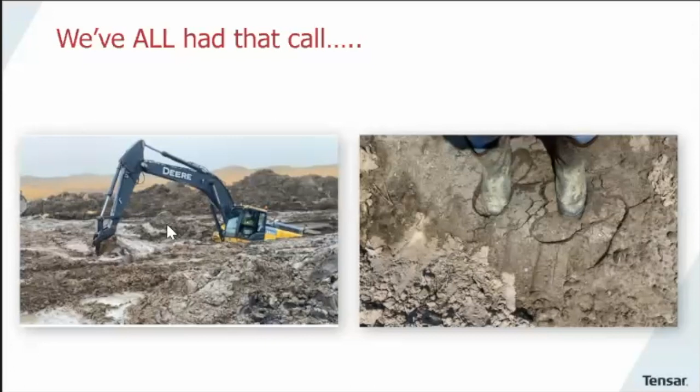What I'm here today to say is, I don't have a golden ticket, a magic wand, or pixie dust. I don't want the takeaway to be that Tensar is the one-size-fits-all solution for every problem you may have. We're another tool for your tool bag. If you get this call, you've all got your own bag of tricks—we can over-excavate and replace, we can do this, we can do that. I just want Tensar or geogrid to be another option, another tool that may help us out of this. So that's the main takeaway: Tensar can be there to help offer a solution when we run into issues like this.

There's a quick agenda, but you'll see that as we go along.

So who is Tensar? As of last year, we are now considered a division of CMC. Has anybody heard of CMC? I'm always curious to see. CMC is a Fortune 500 company—they own the market share for rebar. So chances are, if you've worked on a project and seen a piece of rebar, it came from one of CMC's plants. So we're now a steel company, a plastics company owned by a steel company. And if you've ever driven down farmland and seen a green T-post with a white top, that came out of a CMC plant. That's their trademark, the green T-post with a white top.

So what does that mean to us? It means we now have a large company that's no longer just a capital investment firm, but an actual manufacturer that shares their expertise and resources with us. So far, knock on wood, it's been a good marriage. We've taken a lot of benefits out of it, and I'm anxious to see what happens in the future. Tensar is a very innovative company.

We invented geogrid back in the 1980s, and we've invented every notable improvement on geogrid since then—different sizes, shapes. We're constantly doing research, and we'll talk more about that in the presentation. We've produced almost 1.2 billion square yards of material so far. We own 2 plants in the US and 3 others worldwide, although one of them's in Russia, so I'm not really sure how that all plays out. But anyway, we're a worldwide manufacturer with a large presence in Europe, Africa, and Asia.

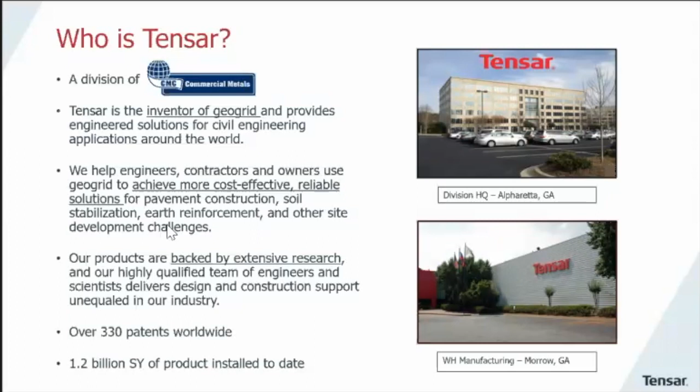Not only do we have people in the field working on a geographic basis, we also have people working on a market-specific basis. So while you're in North Carolina, you might make me your first contact, but if you're working on a petrochem project, we have guys that specifically work in the petrochem marketplace. We have market managers that work in the rail marketplace—if there's large rail projects, we have people in the rail industry that work specifically with that industry. Pavement maintenance, interlayers, public roads—we have a lot of different markets that we focus on internally within Tensar. So I have those resources available: if you're running across a rail project and I don't have a lot of experience, I can leverage one of those guys within our office.

Not only that, we have key account representatives that work with key accounts like Kiewit and Ames, the large contractors of the world—guys that specifically deal with them. If you've ever dealt with Kiewit on a project, you know they're an extremely large company, but extremely fractured. The left hand has no idea what the right hand is doing.

And somehow we've managed to, over the years, break through that and have learned to develop a really good working relationship with Kiewit, along with a lot of other large national contractors as well. So that's Tensar in a nutshell.

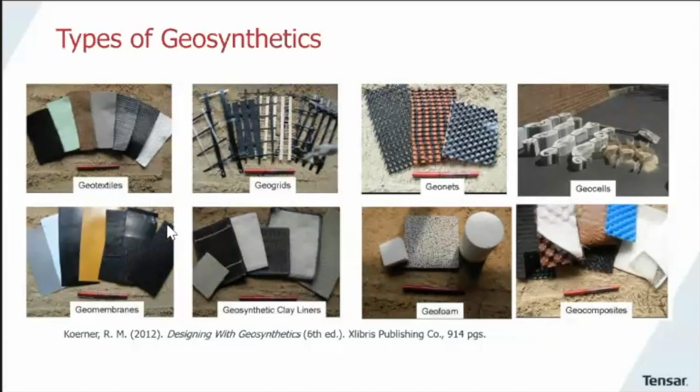All right, let's dive into it. Types of geosynthetics. I don't have a magic wand that gives you a one-size-fits-all solution. There are a ton of different geosynthetics manufactured for the construction marketplace, and all of them have a niche where they work really well, and other applications where they work kind of well. So there's not a one-size-fits-all. Geotextiles work really well in certain applications, geogrids work really well, geonets on down the list. They all have their sweet spot.

These are the main geosynthetic functions you'll see: stabilization, which is dealing with soft soils or soft subgrades; reinforcement, which is basically walls and slopes or grade separation; separation and filtration, which to me are very much the same thing; drainage layers, so geosynthetic drainage layers take the place of like 57 stone or clean graded aggregates, performing the function of getting subgrade water out of your design area; and then containment, like geosynthetic liners.

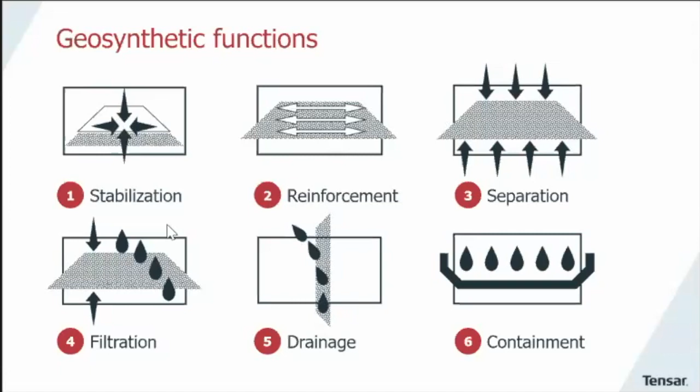Where Tensar really plays with geogrid is in the stabilization and reinforcement market. Now we do have fits in the separation and filtration area, but I wouldn't say you come running to Tensar like, hey, I need to separate these two layers of soils. Yeah, maybe we can, but we're probably not the best fit there. Where we really focus our time is stabilization and reinforcement.

So stabilization, once again, dealing with soft soils, construction platforms, foundations, things of that nature. And reinforcement would be walls and slopes - reinforced walls, reinforced slopes.

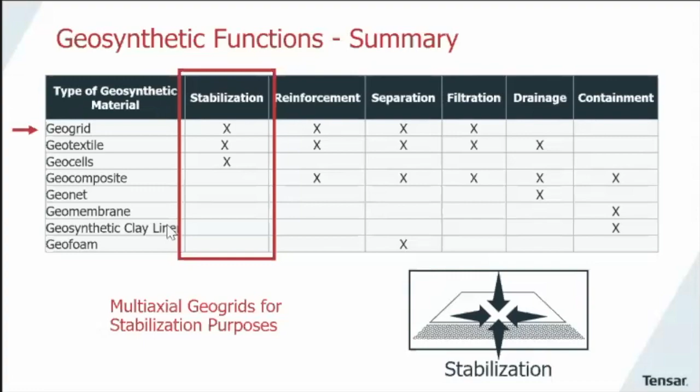So what are geogrids? Geogrids provide these different functions. The main one I'm going to talk about today is stabilization. I brought in samples of different types of geogrids. Tensar invented geogrids back in the 1980s, and this was the invention, the biaxial geogrid.

We still sell a ton of this material. It is not our best seller, but it is up there. We still sell this every day. Contractors use it every day. It still works well. Back in the late 90s, early 2000s, this was the next iteration.

I told you, Tensar loves to research, we love to innovate. So this was the first big innovation that came out of Tensar: the triaxial geogrid. So we have good, we have better, and we'll talk about that in the presentation. Then a couple of years ago, we came out with what right now for the marketplace is the best: this is InterAx geogrid.

I'll pass these around in just a few minutes so you'll be able to see it. That's what an innovative company does - hey, we take a good idea and we keep iterating and improving on it to make the product better, more financially feasible for the marketplace. And all of these geogrids here are used in that stabilization application.

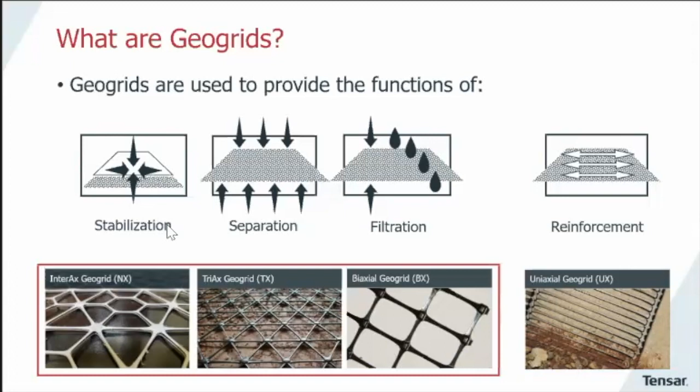And then for reinforcement, we have the uniaxial geogrid. It's a really high tensile strength geogrid that's used to stabilize slopes. As you might imagine, you do need that tensile strength in an MSE structure to stabilize and reinforce it, and that's where uniaxial geogrids come into play.

So here's a picture - we have a stabilized slope, and here we have a wall system. Maybe the geotechs can answer this one if they know, but there's a certain difference where a slope becomes a wall and where a wall becomes a slope. I think it's something like 70 degrees. Seems like splitting hairs to me. All of that is reinforced earth, that's all I know.

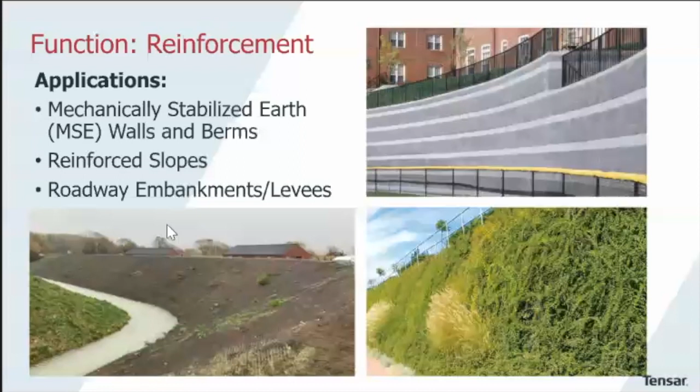I know just enough about walls to be dangerous, but if you do have a wall question, you can come see me after. I'll be happy to address it or get you in touch with David Fuquay, who's our area engineer that can answer that as well.

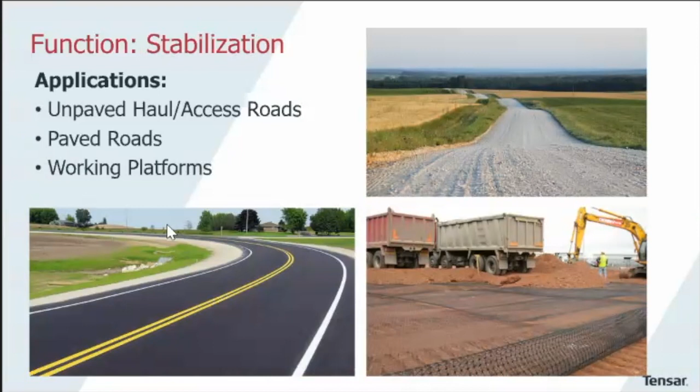However, stabilization - this is our bread and butter. This is what we spend our day in, day out working on: stabilization projects, paved roads, unpaved roads, construction platforms, lay down yards, lots and lots of haul roads. You name it - the softer the soil, the better the fit, the more phone calls we get. So how do geogrids actually work?

We know that geogrids work. Most of you have probably seen them on a job site. Contractor will lay it out, dump some aggregate on top of it, and all of a sudden a soil that was moving and rutting becomes very stable. All right, that's pretty straightforward. But what are the actual mechanisms?

As engineers, we want to dig a little deeper and understand how it actually works. Some really smart guys at the Army Corps of Engineers in Vicksburg, Mississippi, that run their soils lab there, commissioned a report to understand how geogrids work. Mr. Jeb Tingle attended Mississippi State University with me at the same time, and I think he now has his PhD. He's far outshined me in his career. They published this report back in 2003, and they said there are three main mechanisms whereby geogrid performs.

The first is the tension membrane effect. I have it labeled number three, but we'll talk about it first. Tension membrane is simply like a trampoline. You step onto a trampoline, the trampoline has to go into tension to support you. That's how a geotextile typically would perform: you roll a geotextile out over a soft soil, you step on it, or you roll aggregate out onto it, and then you have to rut it in. So that geotextile has to go into tension before it provides the support you're looking for.

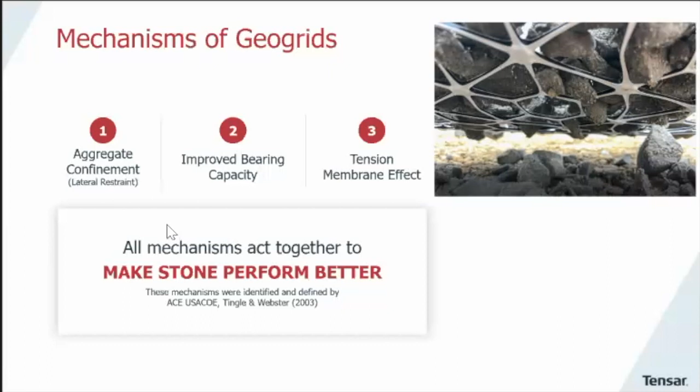Aggregate striking through the geogrid, interlocking, mechanically interlocking with the geogrid and preventing that rutting mechanism. And maybe we can see a better picture of that here. So the best way for me to envision that interlock, that mechanical interlock, is a rack with billiard balls.

So if I lifted that rack up, those billiard balls would scatter all over the table. But because I have that rack there holding it in place, I can come and put a surcharge pressure on top of that billiard ball. And 200, 500 pounds, I don't know how much it holds, but those billiard balls would remain stable because they're being laterally confined, laterally restrained. Same exact way geogrid works.

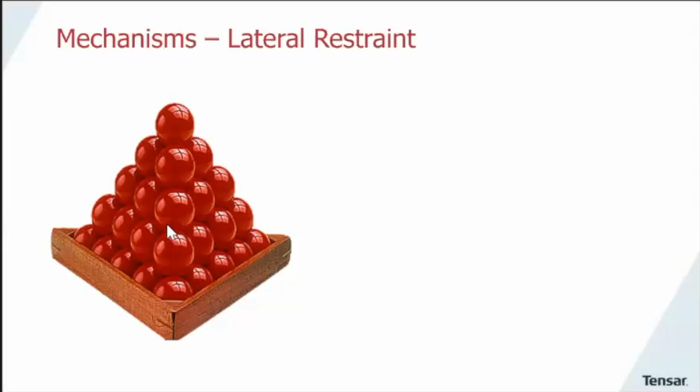So you'll notice there is a vertical component to that, where it's not just one layer of billiard balls thick, it's multiple layers. That's the way it works with aggregate. We're laterally confining aggregate at the bottom layer, and that influence goes all the way up into the section. We've measured that up to about 16 to 17 inches into the section. Is it the same as it is down low? No, but there is still an influence up there.

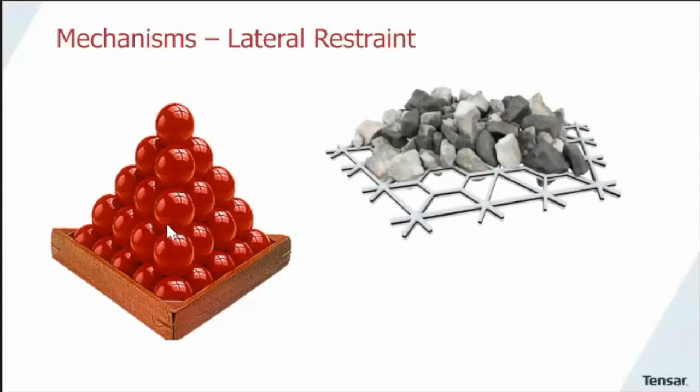So what we're trying to prevent, at the end of the day, our enemy is rutting. Whether that's on a construction platform or a paved road, we're trying to reduce rutting. Rutting is like a lateral mechanism. So what happens: you get the load from those wheels, the aggregate wants to rotate, and it wants to rotate out. What the geogrid does is restrain that aggregate, prevent that rotational motion, and reduce the rutting long term. So it's that simple.

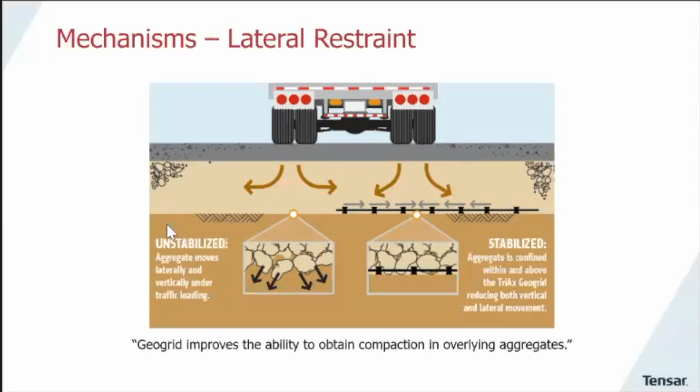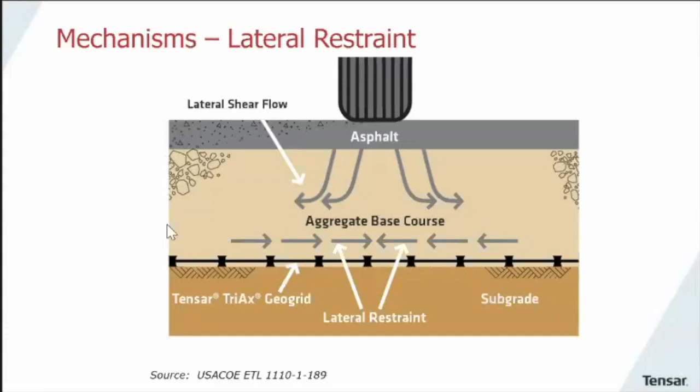And it works. So here's a better picture of it. You've got the asphalt layer, we have that lateral shear flow, and then we have the aggregate base course that's being held in place because the geogrid is there holding it in place.

This is another way to envision it, a little dog and pony show. We call it the magic box of rocks. We build a box, fill it with GAB material, graded aggregate base, and pull the sides off. The whole thing slumps down. If you build that same box with the same aggregate, but add 2 or 3 pieces of geogrid, and pull the sides off, it stays stable because of that lateral restraint mechanism. That's what this does a good job of envisioning.

Now, we can't really design with this. This is just a trick that helps you visualize how it's working, but it doesn't really help you as an engineer in your day-to-day designs.

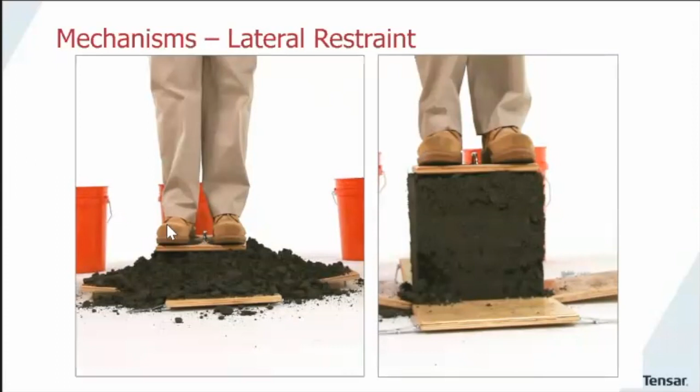So I mentioned good, better, best, and I'll pass these around now. How do we know that, and how does that come back to the lateral restraint mechanism?

Here you see the biaxial geogrid. This is the highest tensile strength geogrid, short of a uniaxial geogrid. Of the 3 geogrids I have up here, this is the highest tensile strength. So if a contractor comes to you and says, this is the strongest geogrid I can get at my local supply house, that sounds great, let's use it. However, as you see here, it's probably the least effective, and it's all due to the height of the ribs.

This is good, we sell a lot of this, it works. This one happens to work better, and this happens to work best. I'll pass these around so you can compare the rib heights on those mechanisms. Geometry plays into that, and a few other things play into it with the chemical composition we use, but by and large, the biggest benefit you get is from that rib height, that rib profile.

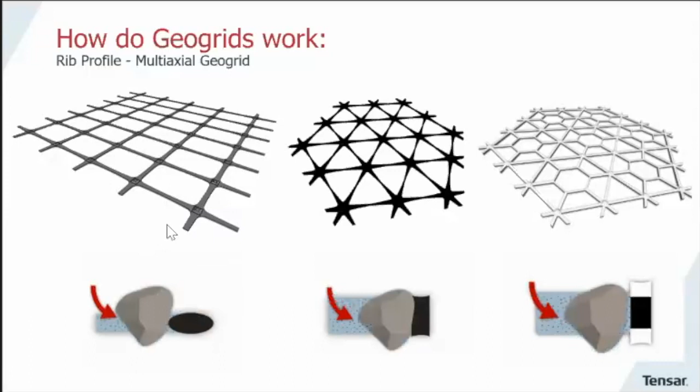So Tensar, innovation. We love to innovate, but we also love to prove our innovations. We love to test. So when we invented triaxial geogrid, we said, let's do a proof of concept. We have this small scale trafficker over in the UK at our plant there. I don't know why they don't move it to the US. So we would make these grids and fly them over to the UK.

They would put them in this small scale trafficker with a 2% CBR clay as the subgrade, and put an 8 to 10 inch aggregate layer on top, then traffic it. An unstabilized, no geogrid section got 3,000 passes before rut failure. The BX geogrid got to 10,000 passes, but you can see the damage done to the subgrade. The triaxial geogrid also got to 10,000 passes, with only a small rut in the subgrade. These pictures at the bottom are after they pull the aggregate out of that small scale trafficker, leaving the soft clay subgrade layer.

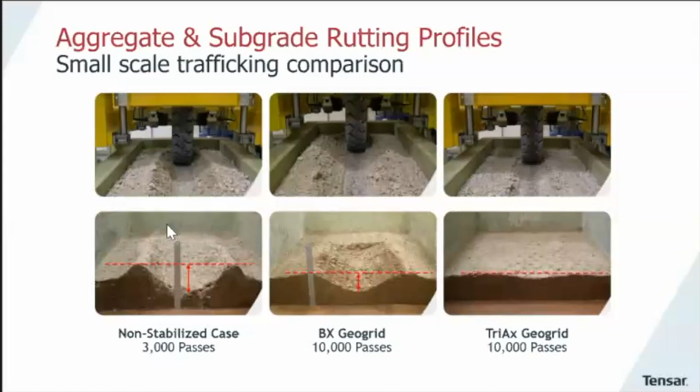So we did the same thing with InterAx geogrid. I saw in a presentation it was over 100 different shapes. We have that kind of weird hexagonal thing going on with InterAx now. Our guys at the plant developed about 100 different shapes, testing all these different geometries to see which one works best, and ultimately the winner is the one you have there.

When they did that, they put it in a small scale trafficker and compared it to unstabilized, no geogrid, to triax, which performed best previously, then the interax, the new geogrid. You can see what happened to the subgrade: a very large rut after 10,000 passes, almost complete failure with no geogrid. Triaxial showed a small rut, and the interax after 10,000 passes showed almost no rut, almost no transfer of stresses to the subgrade from the trafficker, very good job of distributing that load out much more widely.

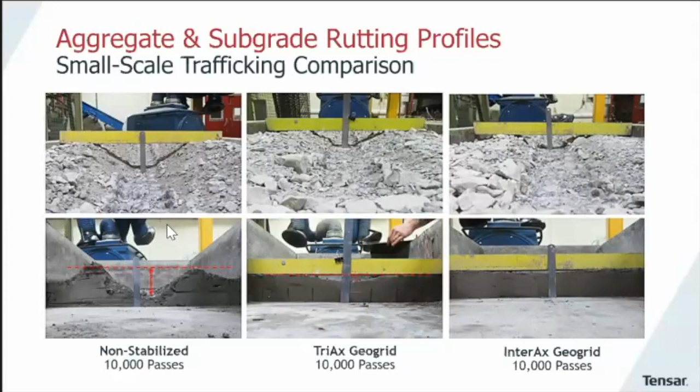So this is just proof of concept. This just tells us, okay, we have a geogrid, we know it's going to work better. Now we have to go out and actually test it.

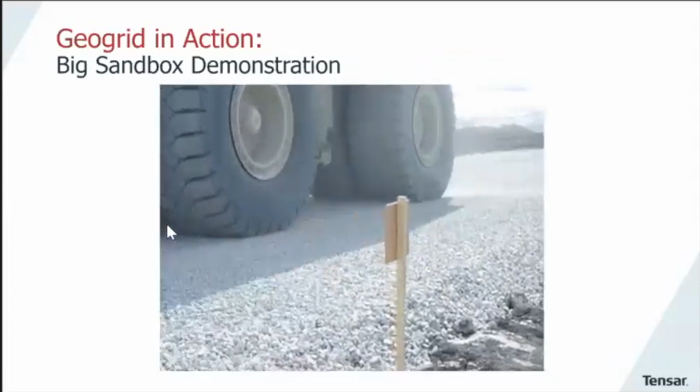So that brings in full-scale field testing. As you might see here, we have a layer of mechanically stabilized aggregate, which has geogrid in it, and then we have a layer that isn't. It's very subtle, so you might want to keep an eye on this and tell where he leaves the unstabilized section, or where he gets to the unstabilized section.

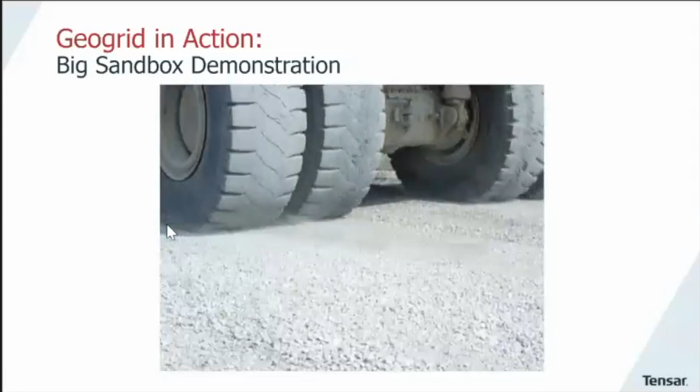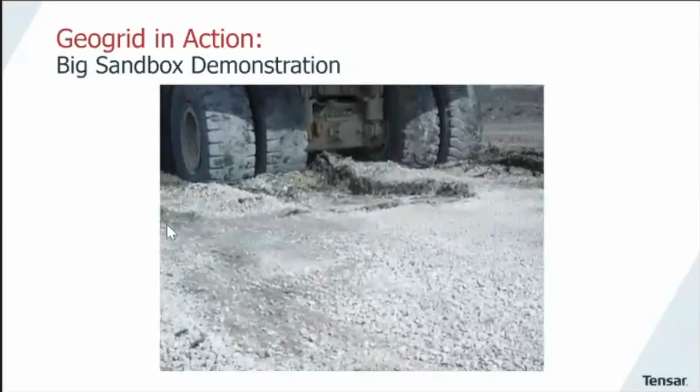The only difference, same amount of aggregate - one had geogrid, one didn't. So it's not a golden wand, it's just another tool in your toolbox, but it's a pretty big tool. I love that video because it really goes over it well.

One thing to be aware of, especially as these grids are making their way around the room, is there's a lot of different geosynthetics used for stabilization applications. You've got geotextiles, polyester geogrids, polypropylene geogrids, which are Tensar's products. Ron, what else are we using for ground stabilization? There's a lot of different solutions.

However, they all have different mechanisms by which they work. We're using lateral restraint mainly for geogrids. Geotextiles are mainly using that tension membrane effect. And there's other mechanisms for others - everybody's got a mousetrap, and their mousetrap works a little bit differently.

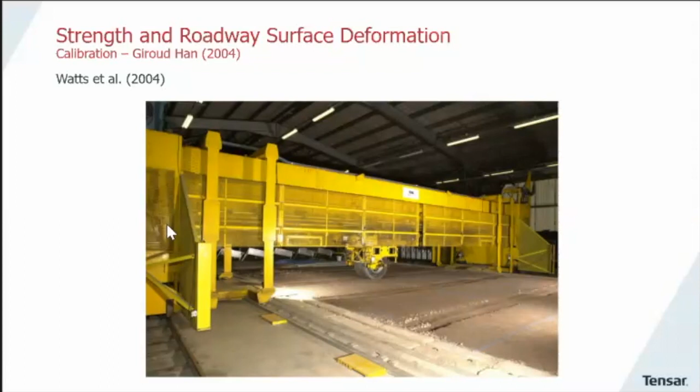So over in the UK, they said, we want to do a deep dive into geosynthetics and see if the tensile strength of the tensile element has any direct correlation to the performance - in other words, does that affect rut depth. So they looked at geotextiles, polyester, polypropylene, HDPE, and what they discovered is that there's really no correlation between the tensile strength and the performance of the geosynthetic.

Now that's not always 100% the case - there's some nuance to that. So I don't want the takeaway to be that tensile strength never matters. It does. But there's a huge caveat, in that different geosynthetics are going to perform differently.

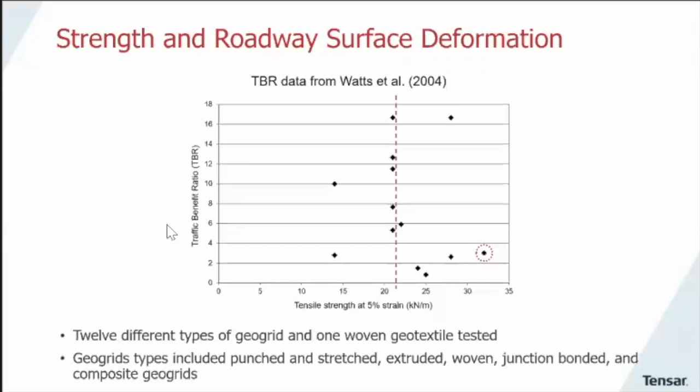Due to years and years of research, we understand there's no correlation between how a geogrid performs and its tensile strength. So much so that the main two design methodologies we use to define the benefit of geogrid are the AASHTO 1993 pavement design formula and the Giroud-Han formula. In either one of these formulas, you will not find anywhere to input the tensile strength for the geosynthetic.

It is all about empirical testing. You have to empirically test, so that way you can understand how well your solution performs, to be able to use these design methodologies that are accepted by the construction industry.

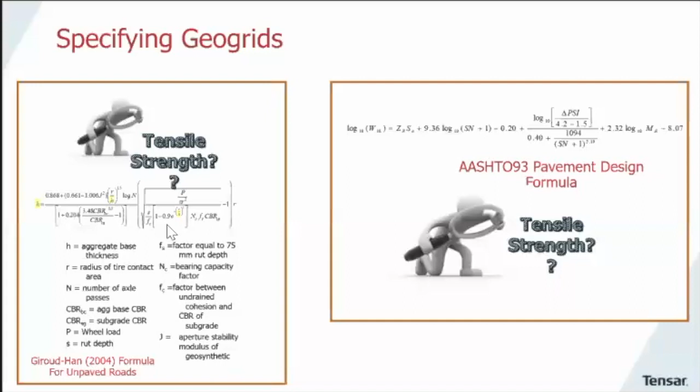If anybody's got a calculator, we can whip one out and go through it, and I'll talk through it. And... nah, we're not going to do that. I've already put enough people to sleep, so we're not going to do that.

But how do we understand how we can apply a geogrid to AASHTO 93 or to a mechanistic empirical asphalt design, or how we can use it for subgrade stabilization and quantify that benefit? We can say with confidence, if you have a CBR of 2%, 6 inches of crushed aggregate and a geogrid will support 100,000 ESAL passes.

We do a lot of testing. We spend millions of dollars testing this product, so that way our proof statements aren't just me up here flapping my gums - it's actually backed up by university and industry testing.

So let's look at subgrade stabilization. I read a lot of different geotechnical reports by different geotechnical engineers, and 95% of them say you can expect weak soils on site, have a plan on how to deal with it, and your options can include excavate and replace, chemical stabilization, or some sort of geosynthetic solution. But they really don't go into the specifics of what that design might be.

And 9 times out of 10, a contractor's on site, being paid unit cost, and they're going to go to their old buddy, excavate and replace. Well, that works great for the contractor, but it takes time. It puts more dump trucks on the road, and it all comes out of the owner's pocketbook.

A lot of times we as engineers are there to protect the owner - the contractor's got everything he's looking for, and I'm not blaming the contractor, that's their job, to put money in their pocket and be as efficient as they can. A lot of times we in the engineering community are there to educate the owner: hey, you have different options besides just over-excavation and replace.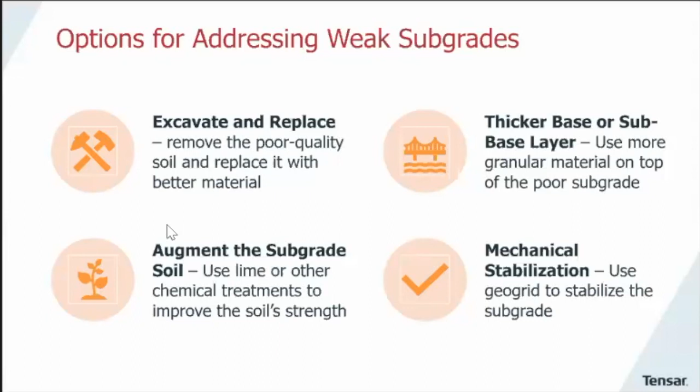So this is the main toolbox that we would go to for the solutions to a soft subgrade. And we have summarized most of those within our design software called Tensar Plus.

I was in Raleigh about four months ago. We had a design seminar where a room with about this many engineers sat down and had an all-day design workshop on using Tensar Plus for subgrade stabilization. But you all have your own spreadsheets or design software.

You can use geogrid, or you can use the geotextile, or just traditional over-excavate and replace. It doesn't matter. So when it comes to subgrade stabilization, we use a methodology called Giroud-Han. We also use another methodology called LAMS, Least Applied Mechanical Stabilization, which is another peer-reviewed way to calculate how much aggregate you need to pass a proof roll on a soft soil.

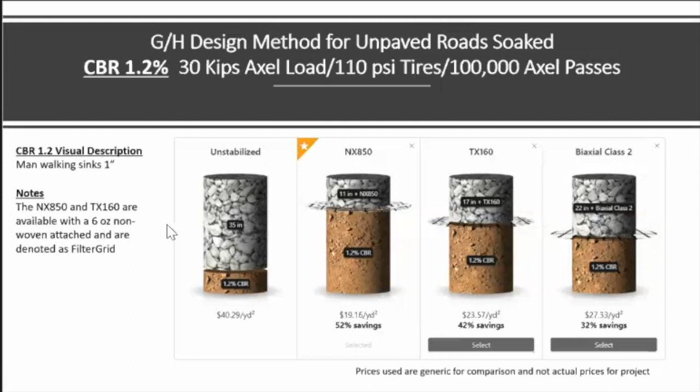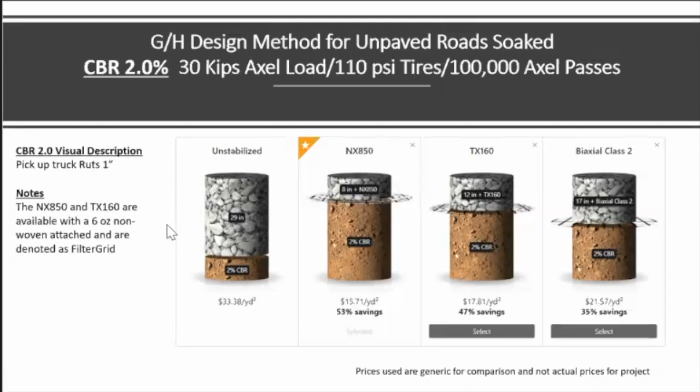Same thing, as the subgrade continues to become more firm, we still had it. Now there's a point of diminishing return, maybe get to 3% CBR, where we can use a less expensive geogrid because there's only so thin we can make that wearing course at the top. These are just really soft soils. A 2% CBR means an F-150 is probably leaving a 1 to 2 inch rut as it drives across. You get to 3% CBR, that's probably not going to pass proof roll, but you could use a less expensive geogrid at that point.

So let's look at a couple of case studies. This one is down in Savannah, but if anybody's done work in Eastern North Carolina, you're going to run across job sites just like this. CSX had to build an access road parallel to one of their rail lines to get out to a bridge to perform maintenance. The road had to be temporary, so they weren't really worried about settlement because it could settle a foot or two, who cares. It's just a construction platform to get out there temporarily.

They looked at a bunch of different solutions. One engineering firm actually suggested piling, putting in mats or putting in piling, a load transfer platform. It was hideous. And then it was going to take upwards of 60 inches of sand to be able to bridge across some of that marine sediment that was out there.

So we came in with the solution using a triaxial geogrid, two layers in this particular instance, and I believe it was like 30 inches. So we shaved it in half over the just non-stabilized, non-geogrid solution. And then that way they were able to push out directly on the marsh grass. You can see them pushing out directly on top of that grass. Bring the sand out, clean, well-graded, not beach sand, well-graded sand out to the job site, and then pull it all back out after they were done.

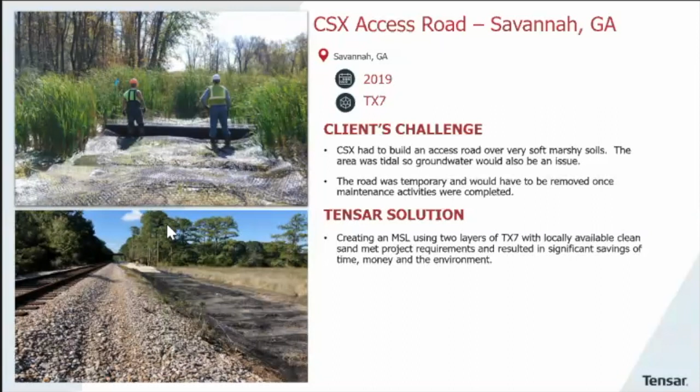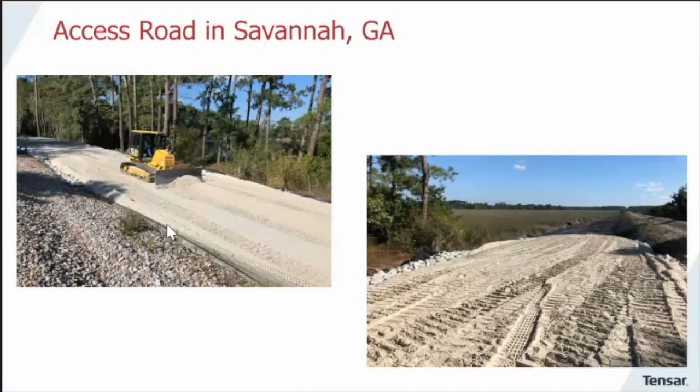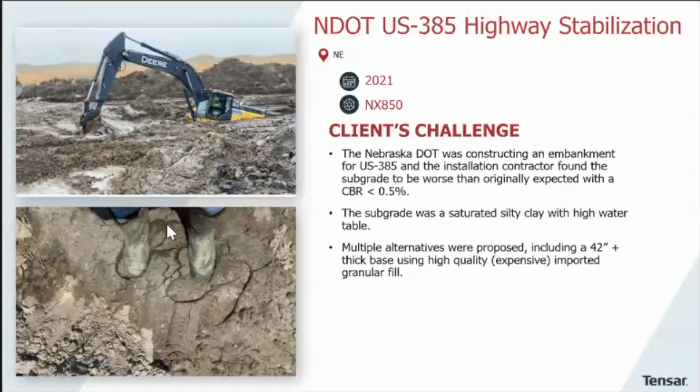So we were able to develop a solution using 35 inches and a single layer of geogrid with sand. So everybody might be thinking, well, those apertures on that geogrid, I saw how big they are, there's no way that can work with sand. We work with well-graded sand all the time. You still get the same benefit of the geogrid, that lateral restraint, using a sandy material. Now, it doesn't work well with poorly graded sand, so if it's a beach sand - but you're never going to get beach sand to compact anyway.

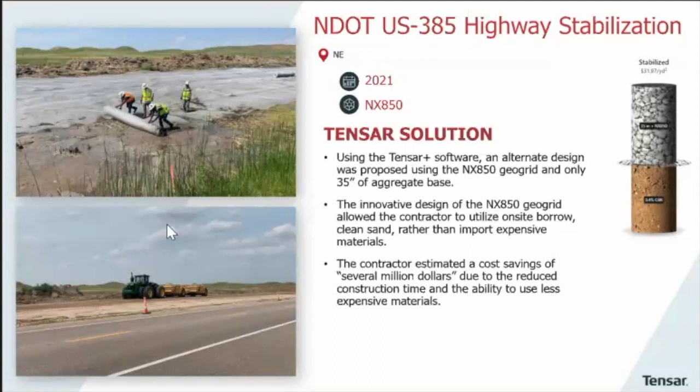So 35 inches of material on top of this swampy layer. They rolled the geogrid out, began back dumping and pushing, and we saved that contractor - we saved the Nebraska Department of Roads, it's not the DOT, Department of Roads - several million dollars.

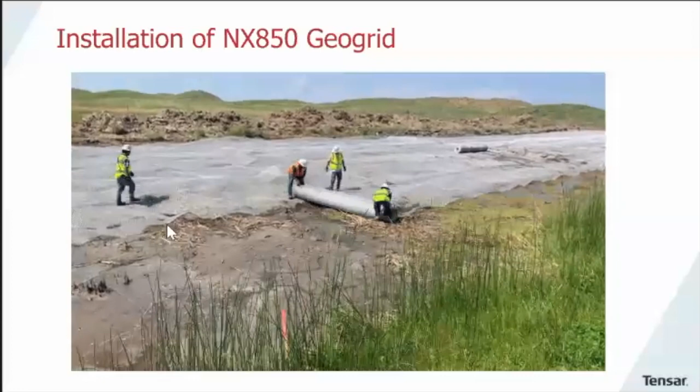So I love this video because it does a good job of showing you exactly how soft this material was. As this guy right here, he's about to step off the geogrid - so that's probably a CBR of about 0.5. So just having the geogrid there, and that second mechanism that I talked about, the bearing capacity improvement - so basically the geometry of the geogrid itself is helping to support the weight of those workers out there. So he's just walking across it, whereas before he would be sinking up to his knee with every step.

All right, so that's subgrade stabilization.

Pavement optimization is another one of our large applications. This one's a little bit more in depth because we do have AASHTO 93, which most DOTs are still using. Most local agencies, counties, cities for local roads, they're using the AASHTO 93 as their pavement design. And obviously we're all well versed into it, but a lot of DOTs are starting to go to ME, or mechanistic empirical design, which we're dipping our toe into as well.

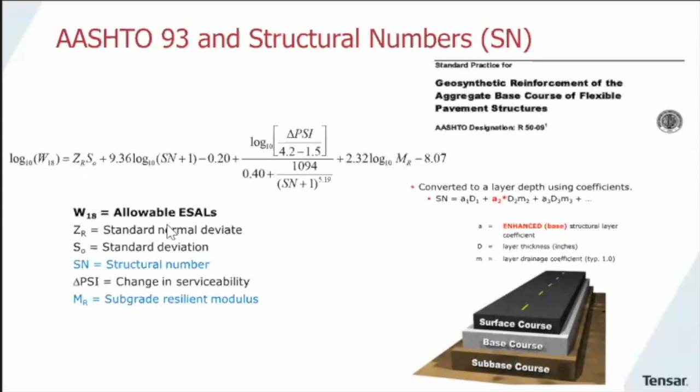But you can go on to Tensar Plus - broken record, Tensar Plus again - and you can do an AASHTO 93 design without grid, and then you can optimize it with geogrid. So if some of you probably haven't even fooled with pavement design since you were back in college, really what we're looking for is allowable ESALs. So the number of axle passes across a roadway over its lifetime, that's what we're trying to solve for. And the way we do that is we develop a structural number, and I'll tell you about that in just a second, over how strong the subgrade is, the strength of the subgrade. Those are the main variables that are in this formula.

So if we know what we want our pavement section to look like, say 4 inches of asphalt over 10 inches of granular aggregate base, we use layer coefficients, and every DOT publishes layer coefficients. We use that to develop a structural number. Your layer coefficient times your thickness of asphalt gives you the structural number. Then you add all your structural numbers up for GAB, layer coefficient of 0.12, which gives you a structural number of 1.2 since it's 10 inches, giving you an overall structural number of 2.96.

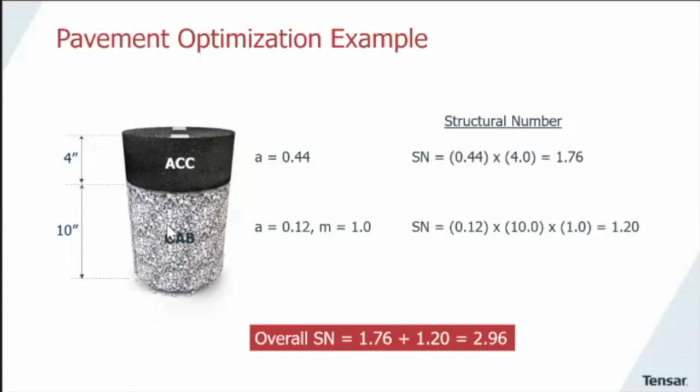Here we're looking for equivalent single axle load, which is an axle load of 18,000 pounds. So one ESAL is an 18,000 pound axle. That means a passenger vehicle with 2 axles has about a 0.0006 ESAL count, whereas a loaded dump truck equals 2.4 ESALs. So what we're really designing for is construction traffic and 18-wheelers, because it takes a lot of these SUVs to equal one dump truck. About 4,000 SUVs is one dump truck.

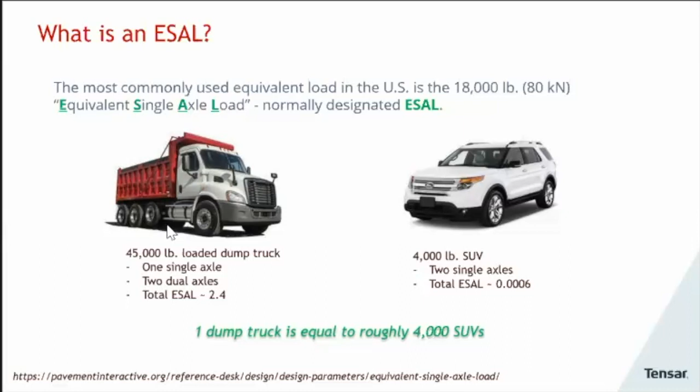So if we take that structural number and dump it into this big long equation, it's going to spit out an ESAL count. So 4 inches over 10 inches over a subgrade of 5,000 PSI resilient modulus, which means about a 4-5% CBR, would give you a 107,000 ESAL count. This pretty much represents being able to pass proof roll. You go out to a site, the contractor proof rolls the site, meaning they don't leave much rut. That's probably a subgrade modulus of about 5,000 PSI, giving us 107,000 ESALs.

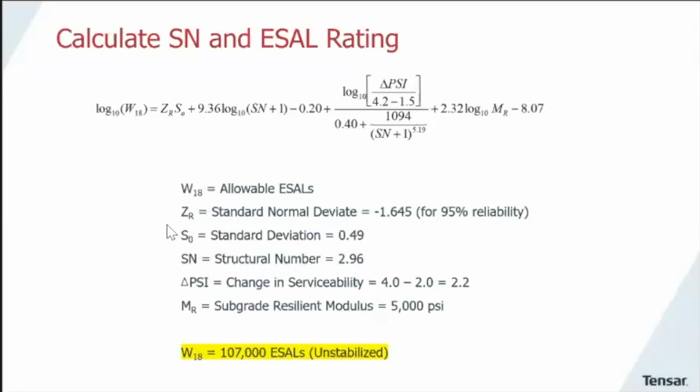All right, everybody understand that? That was a lot real quickly, a lot of Greek symbols.

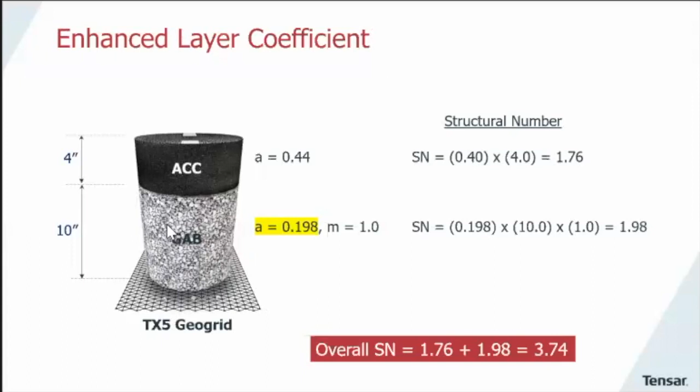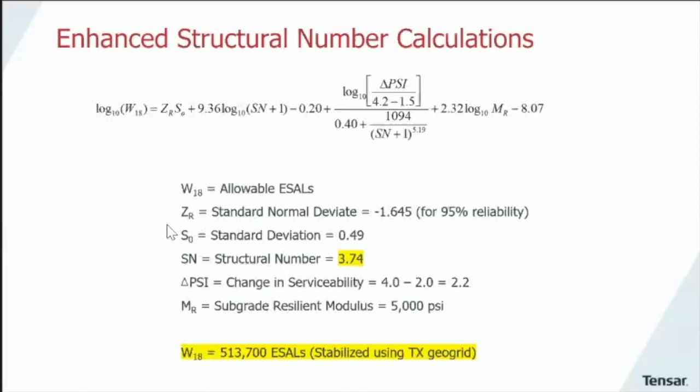However, if we take a geogrid, we can take advantage of it stiffening this GAB layer, giving it a higher layer coefficient, which means a higher structural number, a higher overall structural number, which means a lot more ESALs. So by just adding a geogrid into the pavement section, we increase the ESAL count from a little over 100,000 to over 500,000.

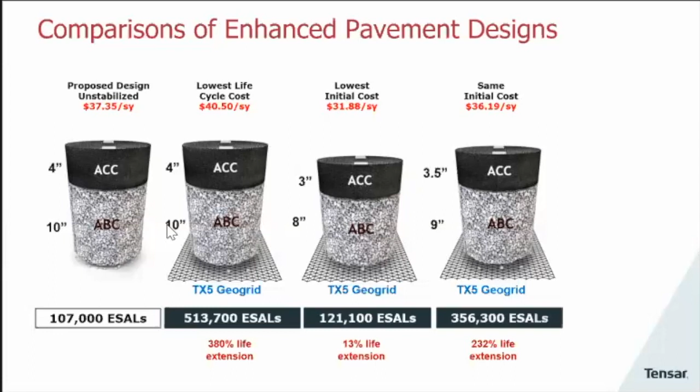And with going onto our software, if you ever use it, it's super simple to change those section thicknesses.

But how are we able, at the very beginning, I said tensile strength or index properties really don't play into AASHTO 93. How are we able to justify that layer coefficient improvement, that improved layer coefficient? It was a lot of testing. Going back to those really smart guys at ERDC in Vicksburg, we spent years testing pavement sections with them in an apparatus called the Full Scale Accelerated Pavement Tester.

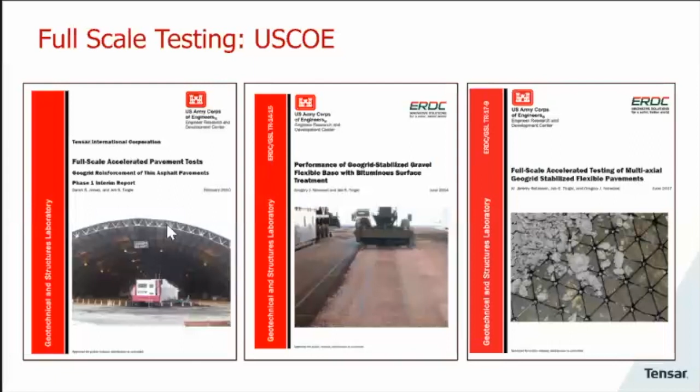Where we build pavement sections, everything is laboratory controlled. We know what the CBR of the subgrade is. We know what the CBR of the GAB is. We know how thick the pavement section is. We know what the wheel loads are going to be. We know what the temperature is, they control the temperature. We know the humidity because they control the humidity.

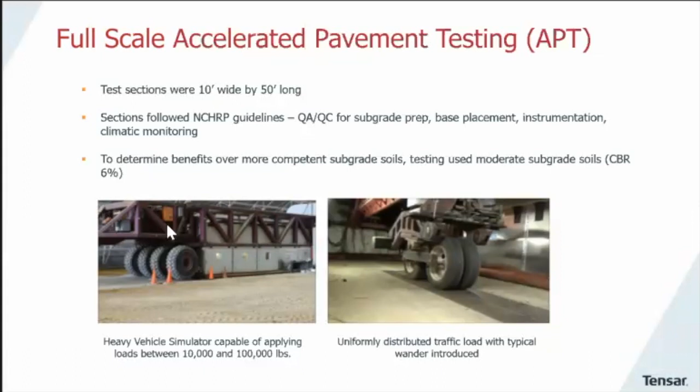And that thing just traffics back and forth day and night for months at a time. Then at the end, to get to a few 100,000 passes, they turn it off and measure the rut depth. So what we discovered using that full scale trafficker, which had 3 different sections—a control section, one with TX5, one with TX8, two different triaxial geogrids—we were able to use less asphalt, less GAB, and we got 5 times more cycles using the geogrid section than we did for the unstabilized section.

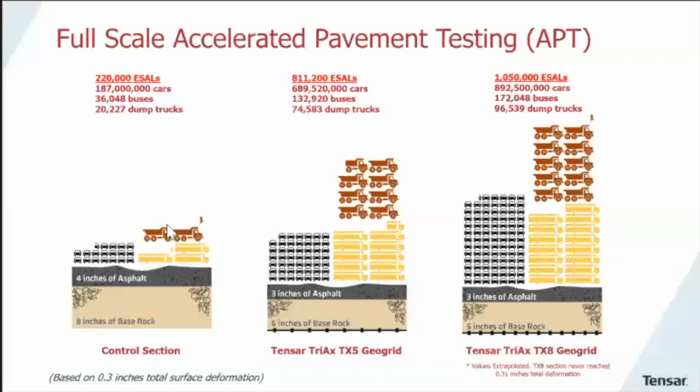So we take that, we crunch it down, and send it out to a third-party agency to develop those layer coefficients for us. So it's not Tensar doing it—it's an actual third-party agency, ARA, if you're familiar with them. They give it back to us and say, okay, these are your enhanced layer coefficients for these types of geogrids. So, all right, that's laboratory testing.

That's what Federal Highways requires us to do. So now we know proof of concept, okay, it actually works. We've lab tested it, so now we can quantify it using industry methodology.

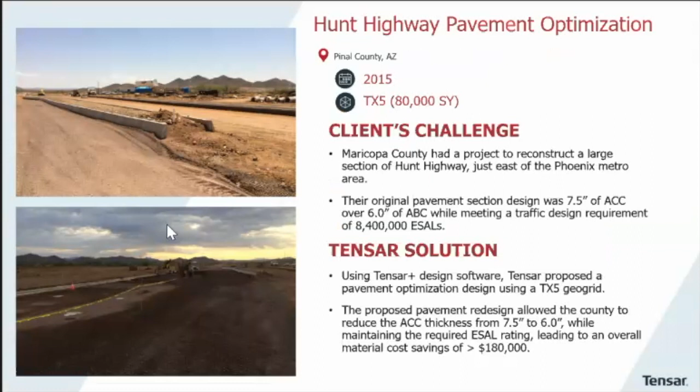So now this is a project out in Arizona back in 2015. We were able to use an apparatus called automated plate load testing, where it's a dynamic plate load test instead of a static plate load test. They can actually mimic traffic loads using a plate load. It's really hard to see here, but that plate load is on a hydraulic ram, and that ram will just sit there and cyclically load the ground like it's mimicking a traffic load.

And what we discovered here is when we did the original design, we used a 0.22 layer coefficient for the geogrid stabilized section, and we ended up with a verified 0.31 layer coefficient measured in the field. So we underestimated the layer coefficient in our design purposely, conservatively, and then we were given a 0.31 that was actually physically measured in the field.

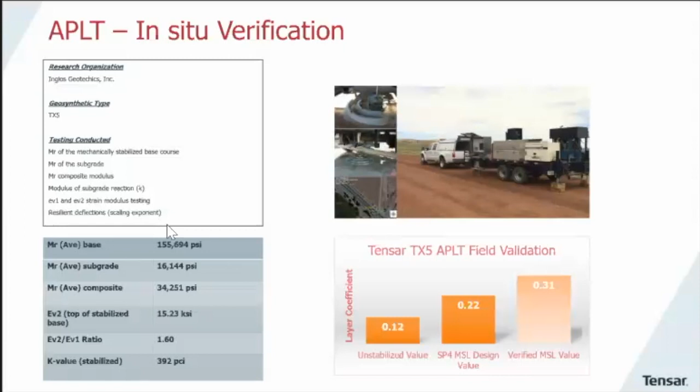So we have done hundreds of this type of test around the country. We've done the laboratory testing, but we've also done validation, in situ verification. So it's not just laboratory testing that we did one time in a controlled manner—this is actually done in the field where you don't have control of the temperature or humidity or any of those other factors. So all that to say, you can have confidence when using our design software for pavement optimization and subgrade stabilization, because we do a lot of this with subgrade stabilization as well.

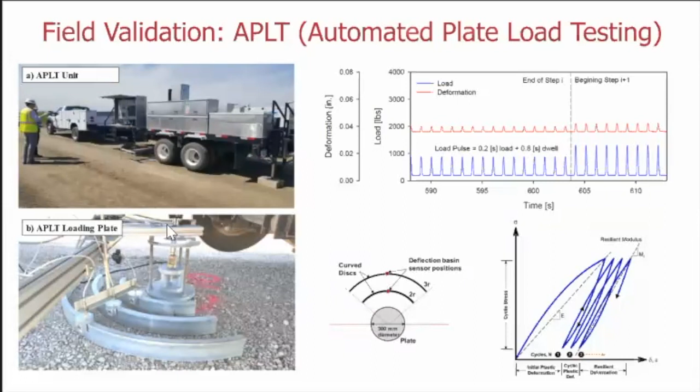In the field, here's some of that output—that's a better picture of the plate load as they're testing it, and then they're measuring deflection at different distances off of that plate as it cyclically pounds into the ground.